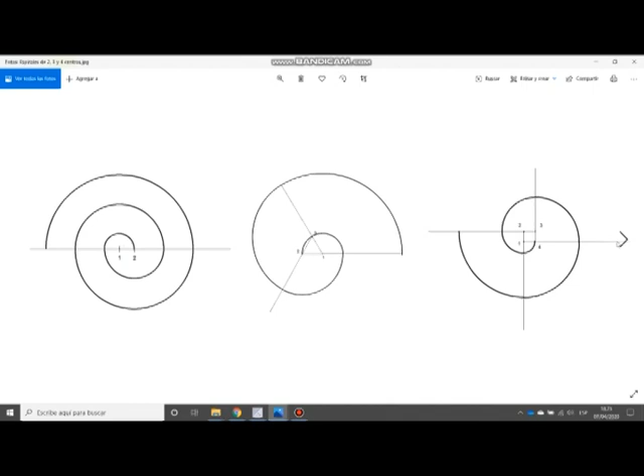So we are going to see step by step how we are going to draw these spirals in order to do a final composition with some colors. As you can see here, this will be the 2-point, this the 3-point spiral, and this one the 4-point center spiral. To start with the 2-point center spiral, you have to draw a straight

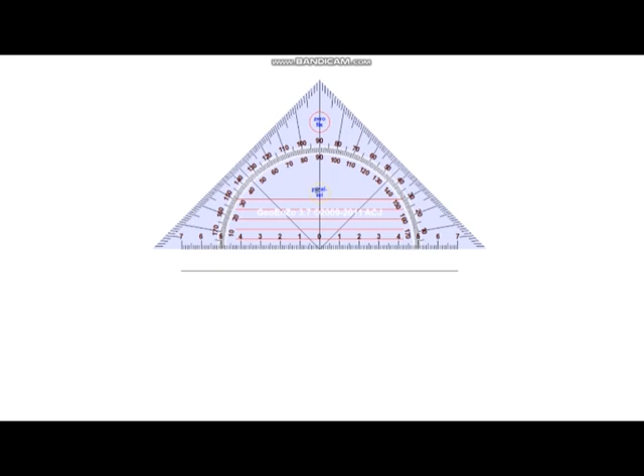horizontal line. And when we have drawn it, you are going to mark the 2 centers of our spiral. In my case, I'm going to do it with my compass, and I'm going to set the 2 centers at a distance of 0.5 centimeters.

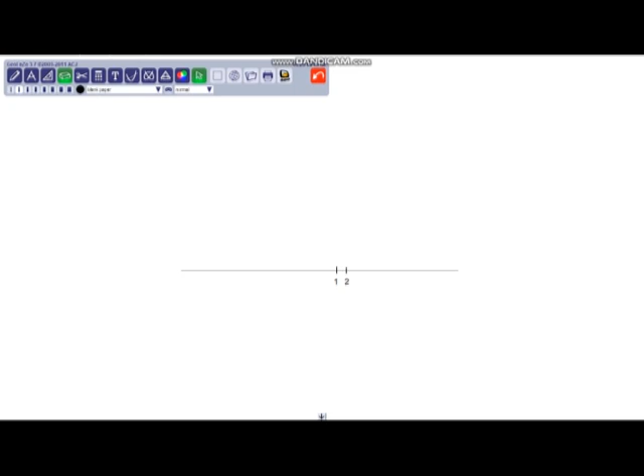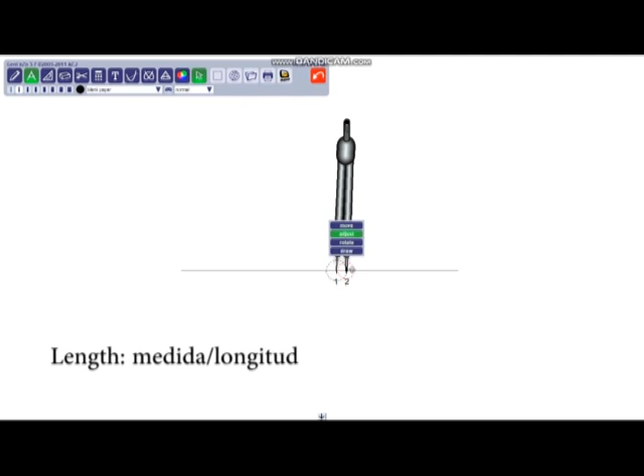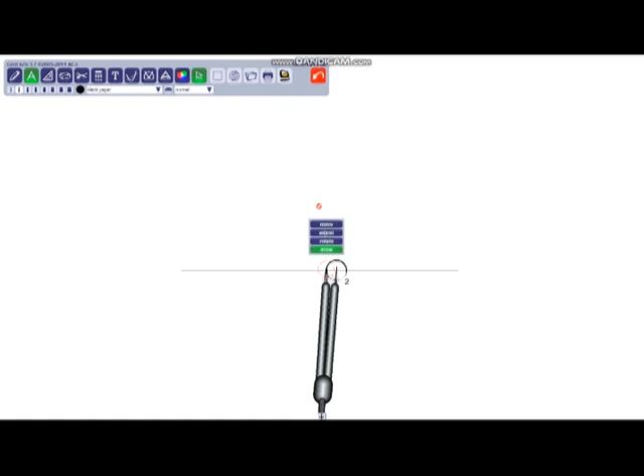Okay, so when we have our 2 centers of our spiral, I'm going to set the compass at point 1, and now I'm going to open the compass with the length 1-2, and I'm going to draw an arc to the left till it cuts the horizontal line that we have drawn at point A.

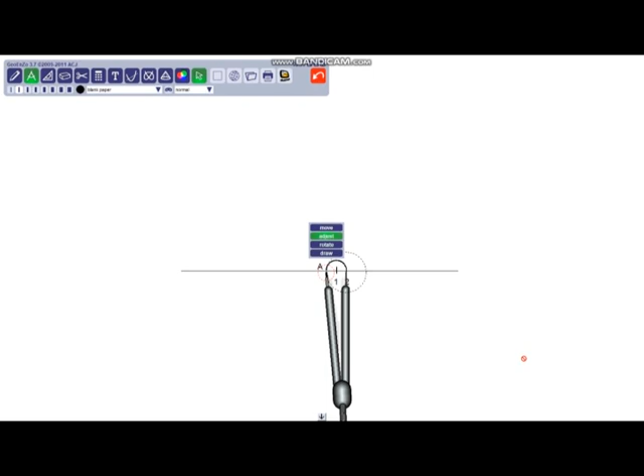Now we have to set the compass at center 2, and we have to open it with the length 2A. That is to say, where our arc has ended. So when we have placed it there, we are going to draw another arc till it cuts the horizontal line in point B.

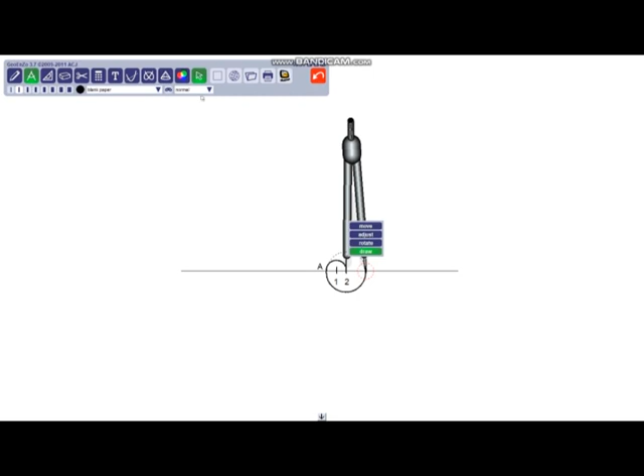And now what we have to do is repeat these steps till we have the spiral that we want to get. So we will be repeating these steps as much as you want.

Now we are going to continue with the 3-point center spiral. So the first thing that we have to do to draw a 3-point center spiral is draw an equilateral triangle. An equilateral triangle is a triangle whose sides have the same length.

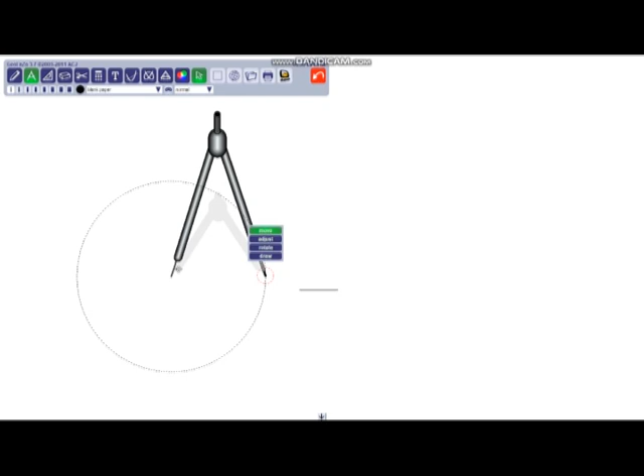So to draw an equilateral triangle, the first thing that we are going to do is draw the bottom side. In the other sheets, we have seen how we draw a triangle. So because we know in this case that all the sides of the triangle are going to have the same length, what we have to do is set our compass at the vertex of the bottom side, open it till the end of the bottom side,

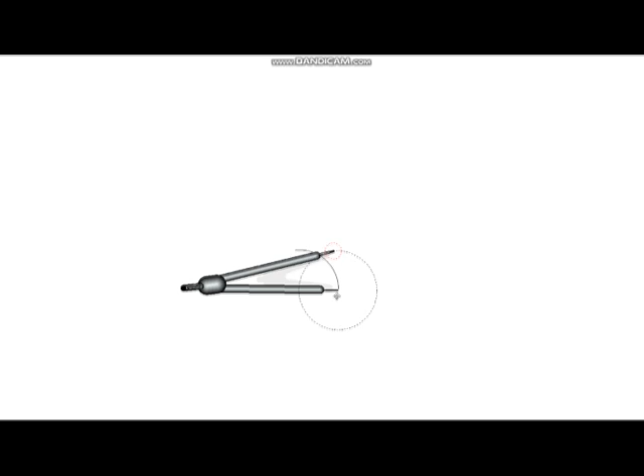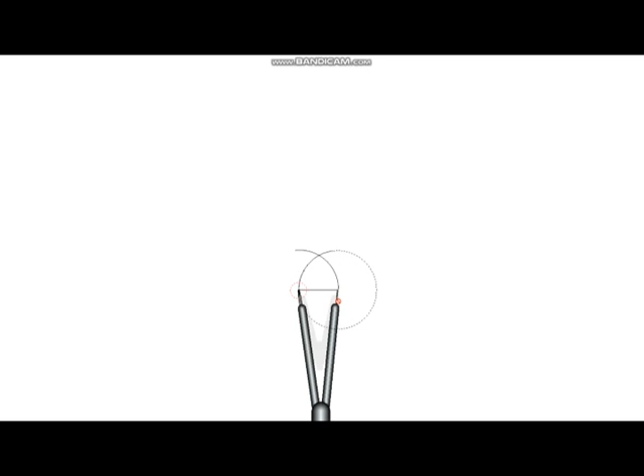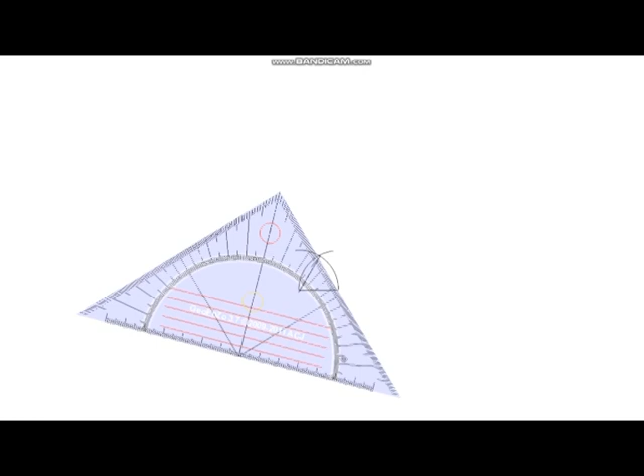and draw an arc. And we are going to do the same at the other vertex of the bottom side. When we have drawn our two arcs, we just have to join the bottom vertices with the vertex of the upper part of the triangle. Each vertex of our triangle is going to be one of the centers of our spiral.

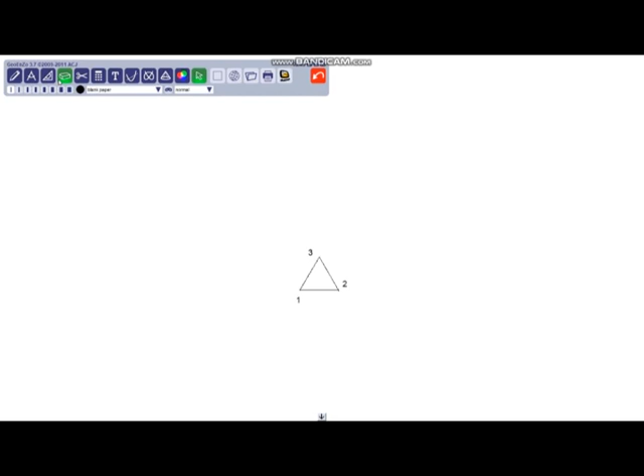So now what we have to do is prolong the sides of the equilateral triangle, and I have to warn you that the directions of the prolongation of the sides of our triangle are very important, because if not, you are not going to do the spiral in a proper way.

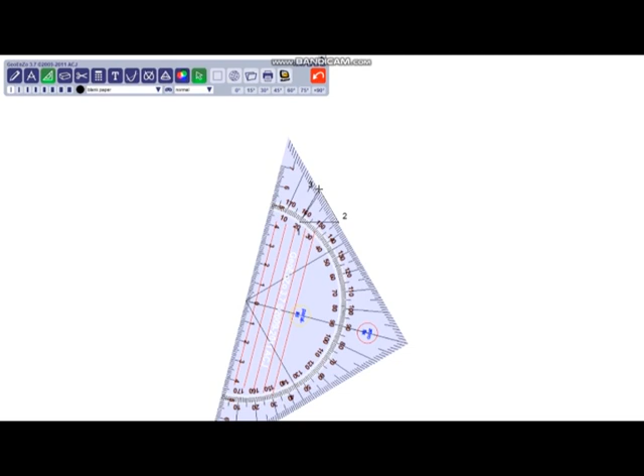So we have to prolong the side 3-2 in the direction of 2, now we have to prolong the side 1-2, and we do it in the direction from point 2 to 1.

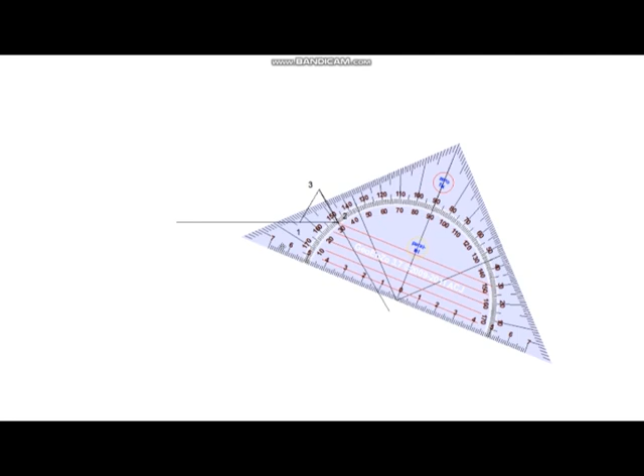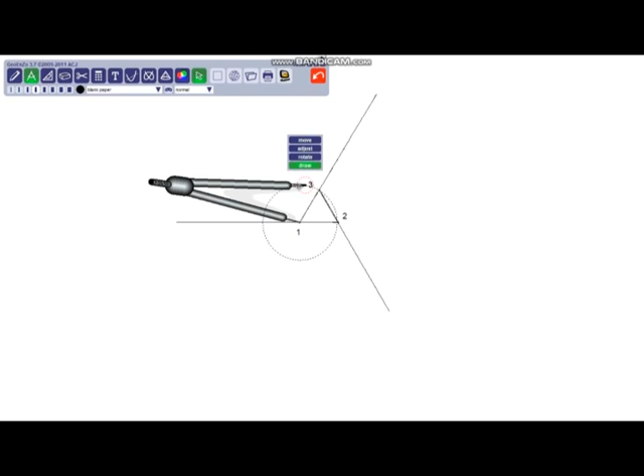And finally we have to prolong from point 1 to 3. Now when we have the prolongations of the sides of our equilateral triangle, we set our compass at center 1 and we open it with the 1-3 length of the triangle.

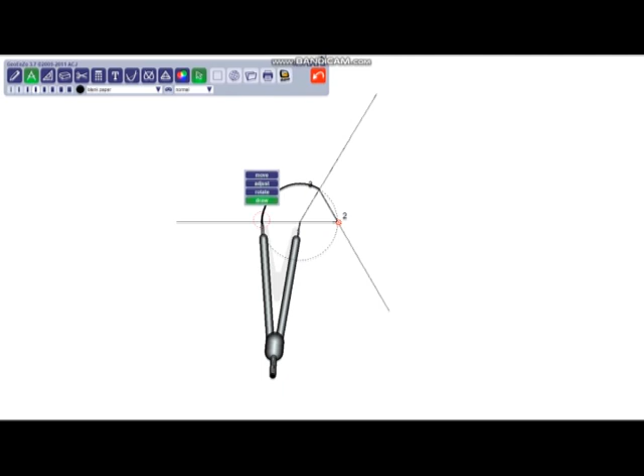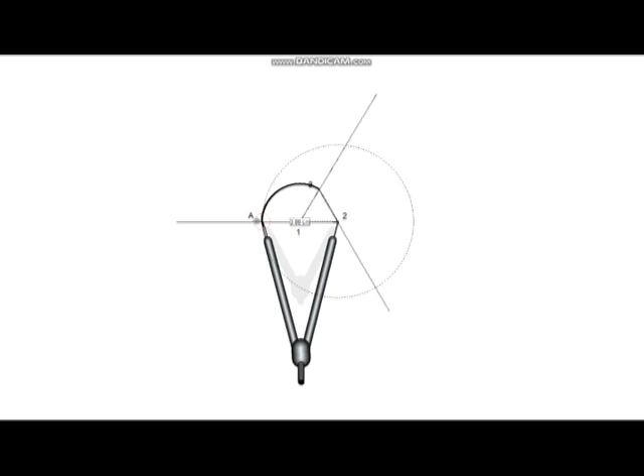And when we have it, we draw our first arc till it cuts the prolongation of the 2-1 line. Now we move again our compass to center 2 of our spiral, and we are going to open it with the length 2a, as we are seeing. When we have it, we draw another arc till it cuts in the prolongation of the 3-2 side.

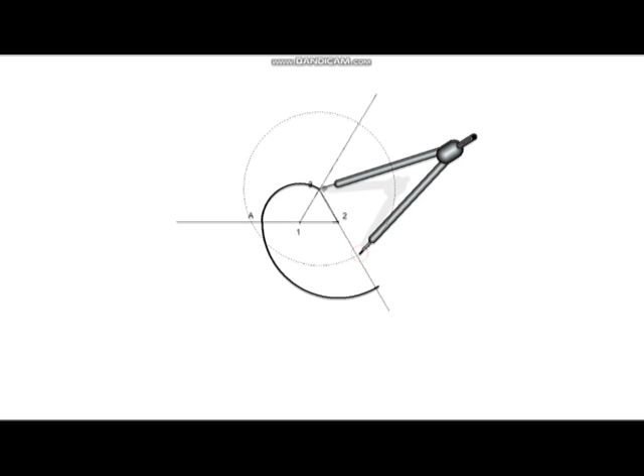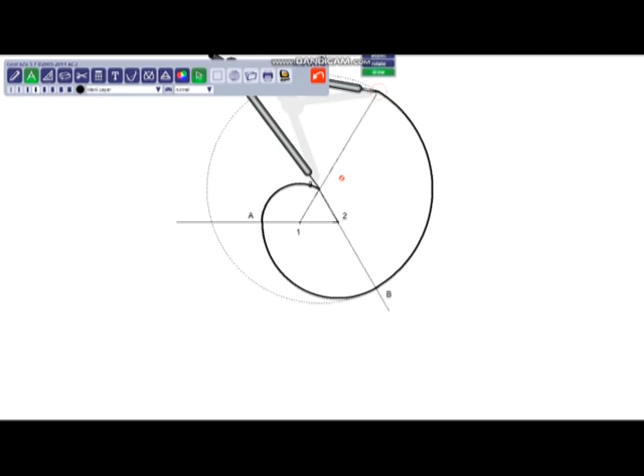So now we move the compass to center 3 and we open the compass with the length 3b. We draw our following arc till it cuts with the 1-3 side prolongation.

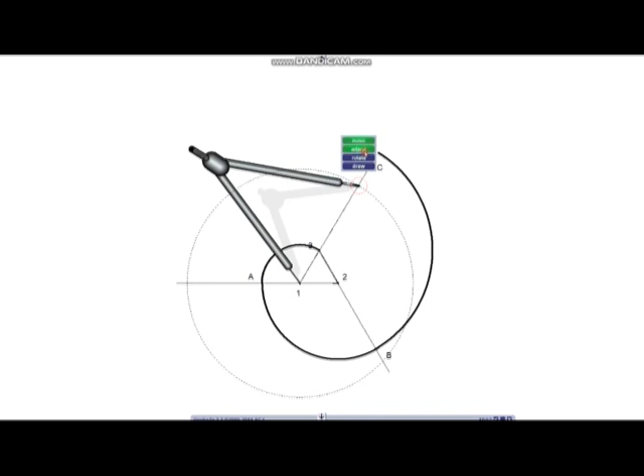So now what we do is restart from the beginning, because we have set our compass again at center 1, and we have to follow the steps that we have done, but in this case we are going to be opening the compass more and more till we have the spiral that we want to obtain. So you have to repeat these steps as much as you want.

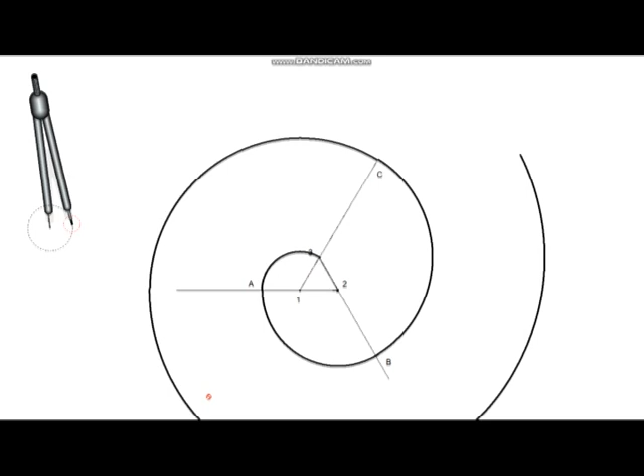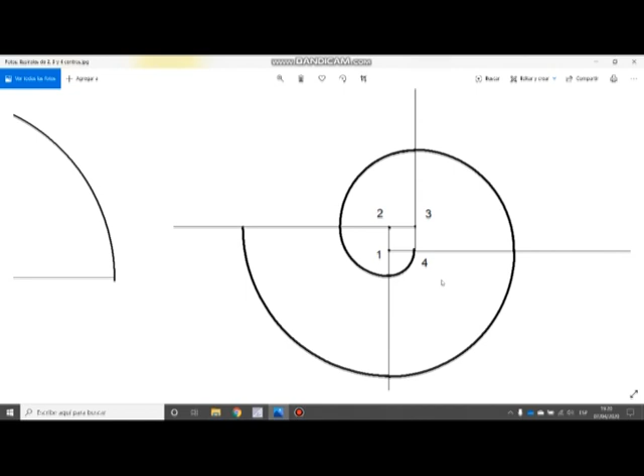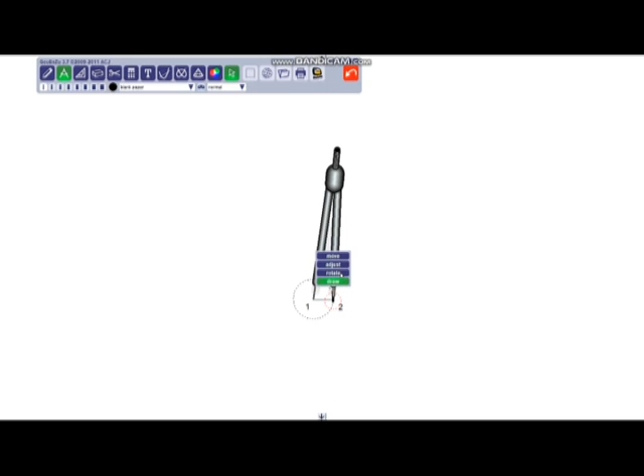Now we are going to see how to draw the 4-point center spiral. So the first thing that we have to do is draw a square. As you can see, that square is going to be the center of our spiral. So I already drew the 1 and 2 vertex of my side of the square, and what I have to do now is set my compass at one of the vertices of my square, at 1 or 2, and now I'm going to draw an arc.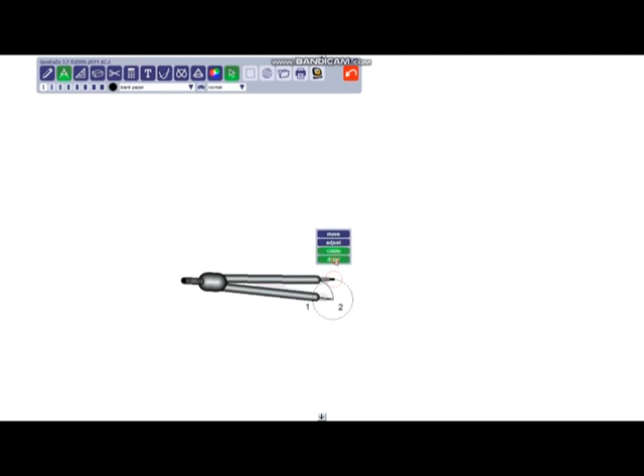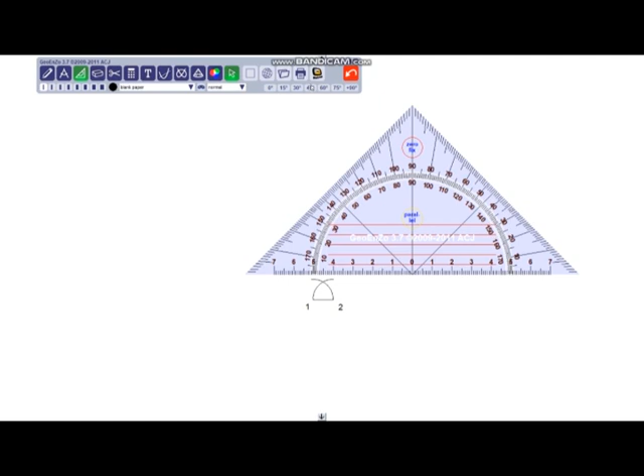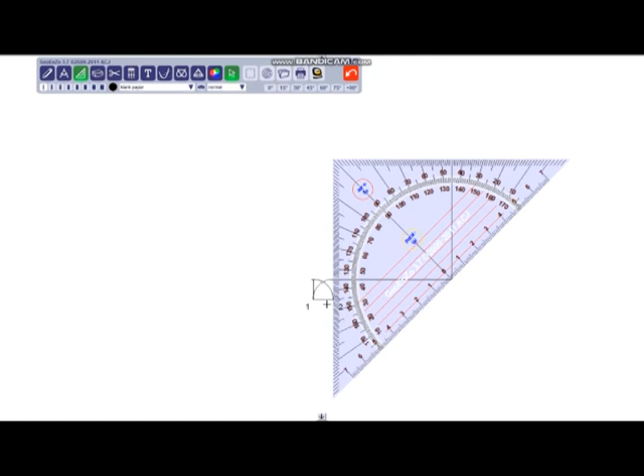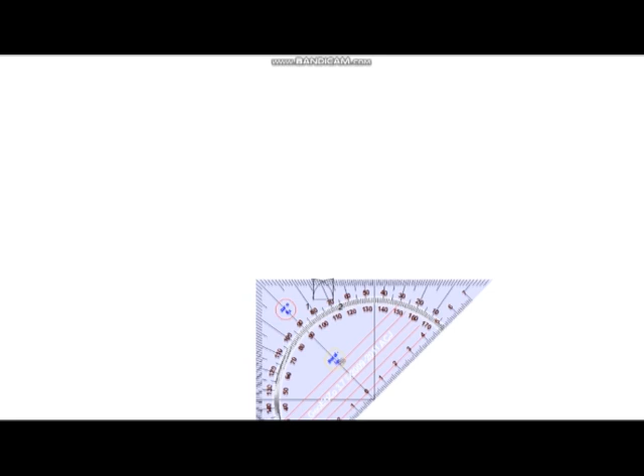Now I repeat the same from point 2, that is to say from the vertex 2 of my square. Now I take my set square and I draw a vertical perpendicular line from vertex 1. I do the same from vertex 2 of my square. And now I can see that these 2 points where my arc and my perpendicular vertical line cross are the vertices of my square.

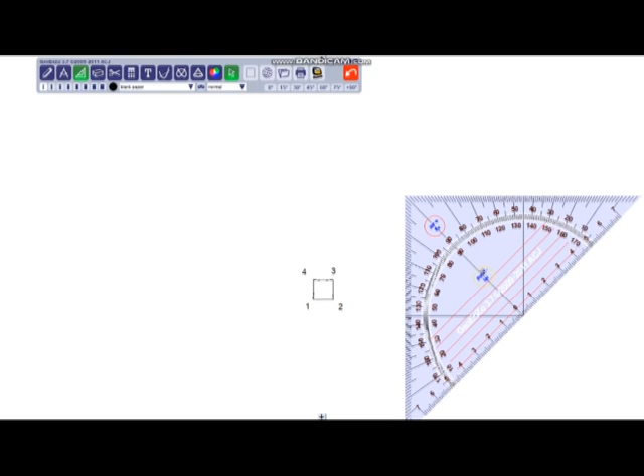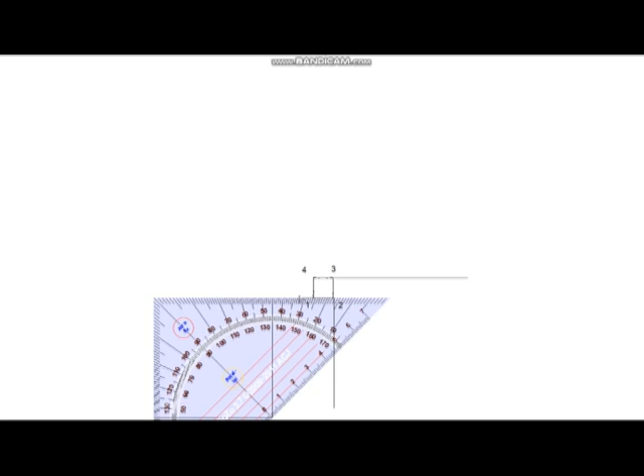So once I have the square drawn, I have to prolong the sides in the following directions. We are going to prolong the side in the direction 4 to 3. We are going to prolong in the direction 3 to 2. We prolong the side in the direction 2 to 1 and 1 in the direction to 4.

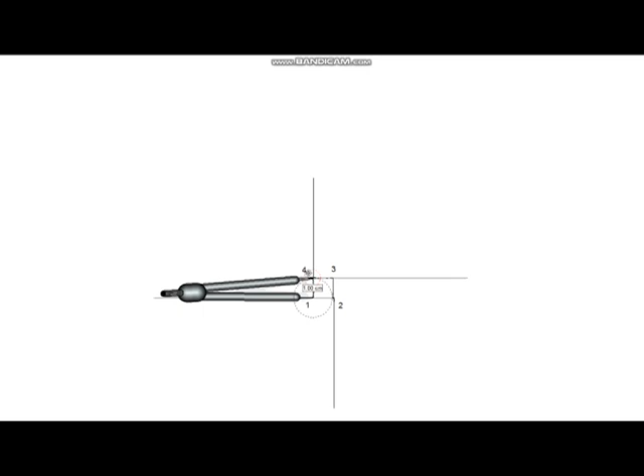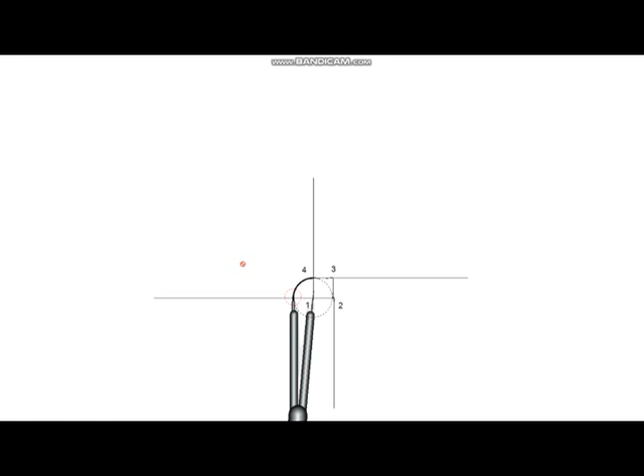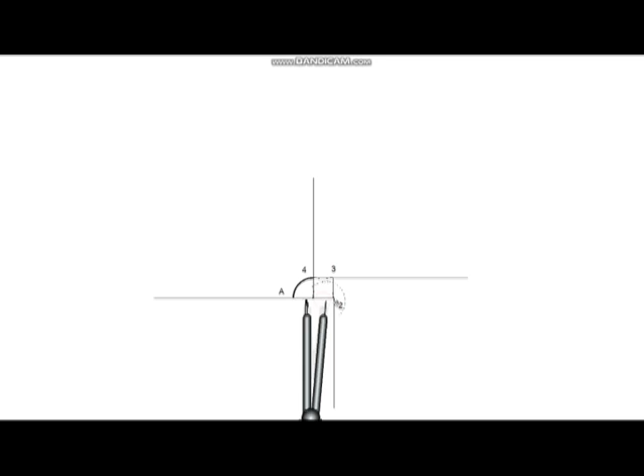So when we have the prolongation of our sides, we set the compass at center 1 and we open it with the width of 1-4. So now, when we have the measure, the length of 1-4, we are going to draw an arc to the left till it cuts in the prolongation of the 2-1 side. And we are going to call this point A. So now we set the compass at point 2, at center 2, and we open it with the length 2A.

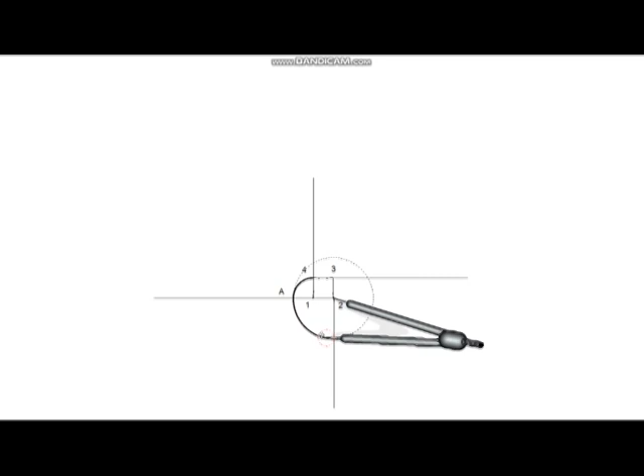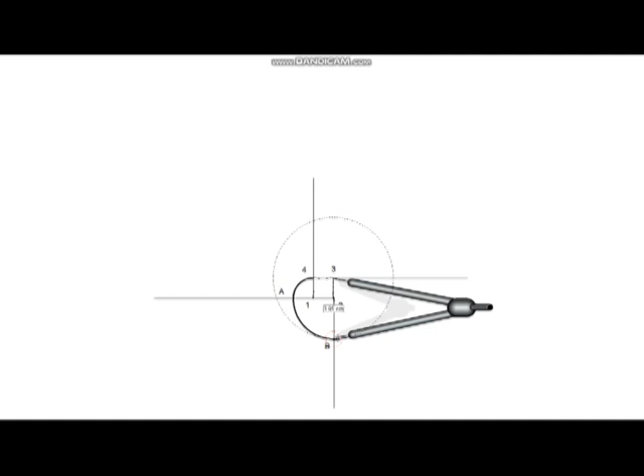And we draw another arc till it cuts with the prolongation of the side 3-2. Now we set the compass at center 3 and we open the compass with the length 3B. We draw the following arc till it cuts the prolongation of the 4-3 side, and this point is going to be called C.

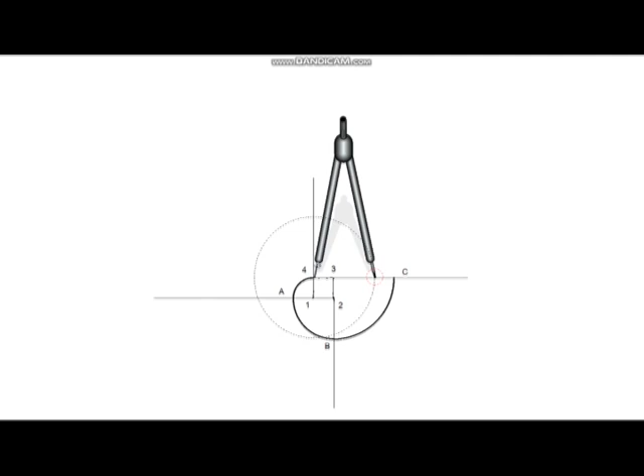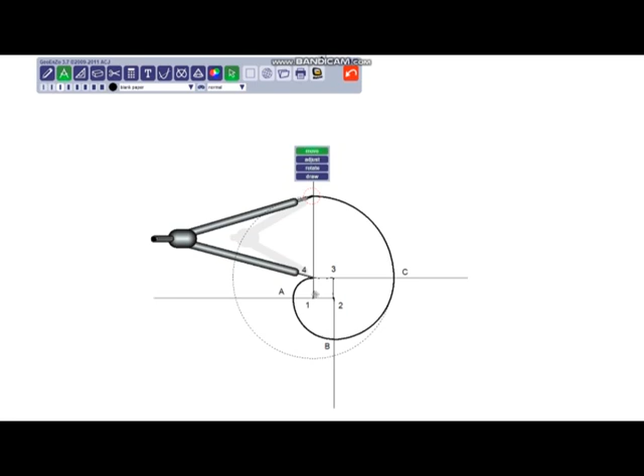We set the compass at center 4 and we open it with the length 4C. And now we draw the following arc till it cuts with the prolongation of the 1-4 side. And now we can repeat these steps as much as we want till we get the spiral that we want to obtain.